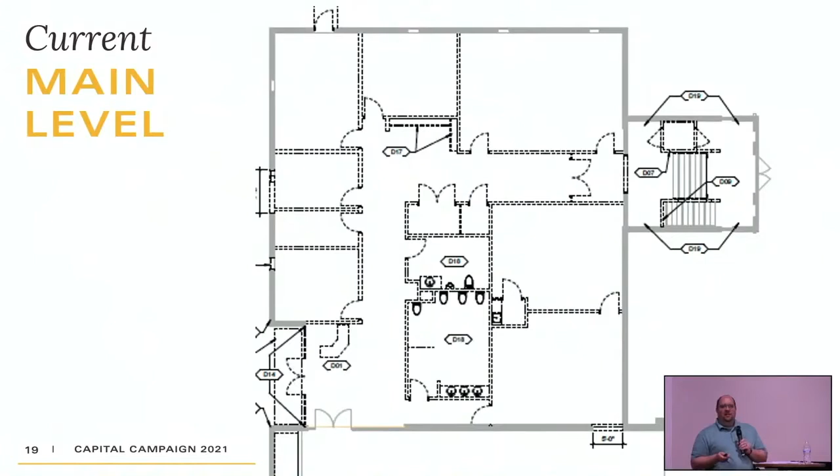We'll look at kind of where we are right now. I apologize for those online, I'm going to use a laser pointer, but we come in off the parking lot, and you've only got one choice of where to go, but you can't see your destination. You can't see the sanctuary. You have to go down a long hallway, take a hard left, and then about the time you get two-thirds of the way down the hall, you finally see the sanctuary doors.

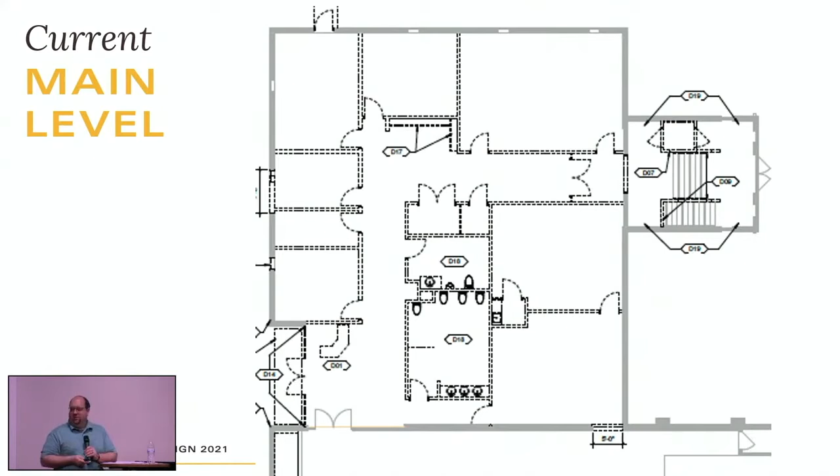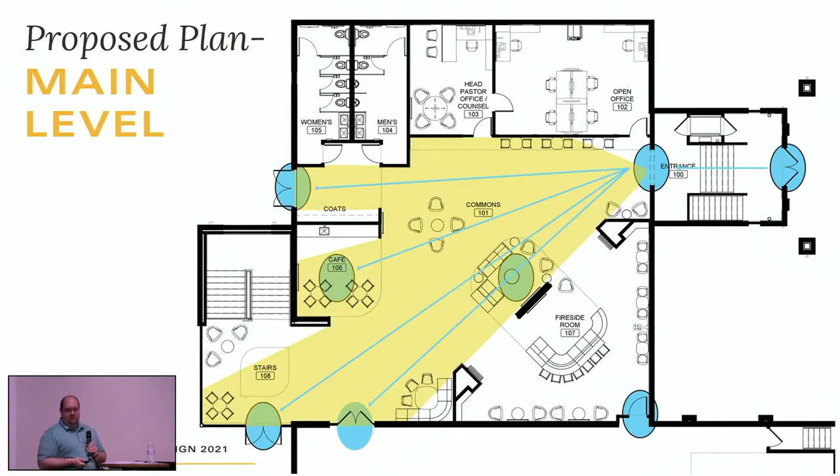Opening up those sight lines, being able to arrive, being able to instantly know where you're wanting to go, even if that's not your immediate destination, knowing where your final destination is comforting. It provides guests and visitors with a sense of welcome. We've got several opportunities to gather in different spaces, in different sizes, some formal, some informal. We've got access that brings everybody together, whether from the parking lot next door and coming in the University side, or from the main parking lot where most everybody comes in. Both provide opportunities for accessible entrances. Right now, that's difficult with our current configurations.

These are the things I find exciting. You get to see them in 3D and color. I'm a bit of a geek, though.

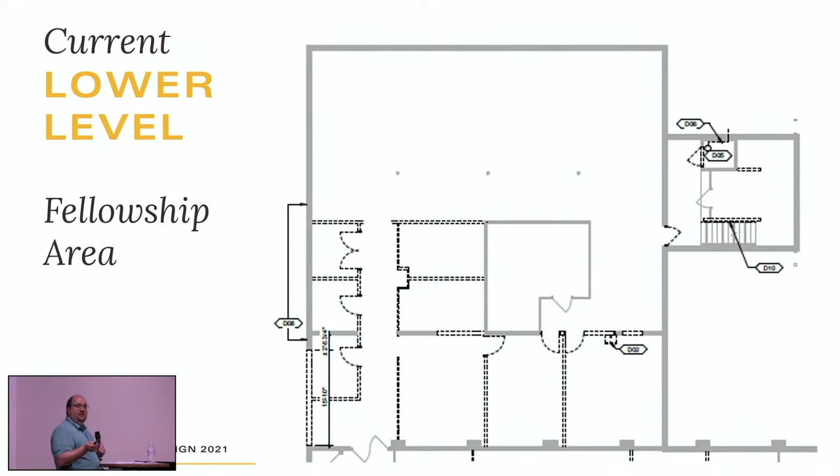Functionally, most of you know that's not really how we use that space. As we look at it, we queue up through the little rooms right there for meals and head around the kitchen. And so it makes a lot of sense to formalize that relationship.

The kitchen is what it is right now. Nobody's touching it. It's in good shape. But we really open up these areas between Fellowship Hall and opening up these classrooms down here into a new youth commons with large open corridors and openings that allow everything to flow together, to feel like more like one big open space. It will almost double our seating area for meals if we wanted to.

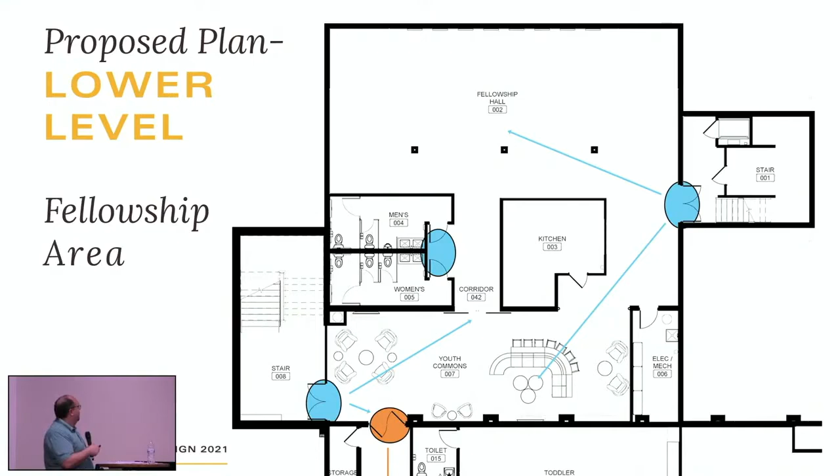At the same time, both upstairs and downstairs, we provide new restrooms that are more easily located for everybody to get to and more sized more appropriately for the capacity during Sunday services.

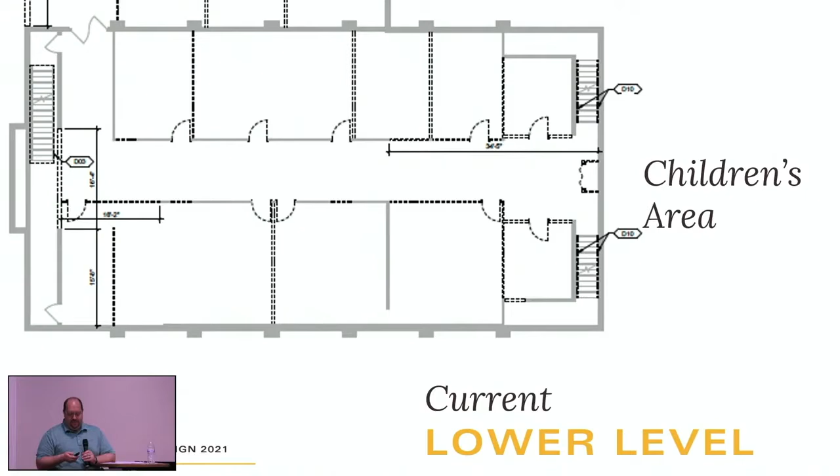In the existing children's area, as you know, we come downstairs right into the current children's area, and you either head up toward the dining area, fellowship hall area, or into the children's wing. Some of the concerns we heard from the groups were security, having our children safe, having the building safe, and having a stairway that goes right down into children's ministry is not ideal.

So we've looked at what are those opportunities to create more security points if we need them, both as a formal relationship and kind of an informal relationship. And as part of that...

Kids need bathrooms, right? We've got ones up here. We're going to bring everybody downstairs into one location, all of the kids together. We've got bathrooms that are located for the children's area behind the current set of double doors, eliminating that current stairwell, creating a very open, more daylit, more inviting stairwell.

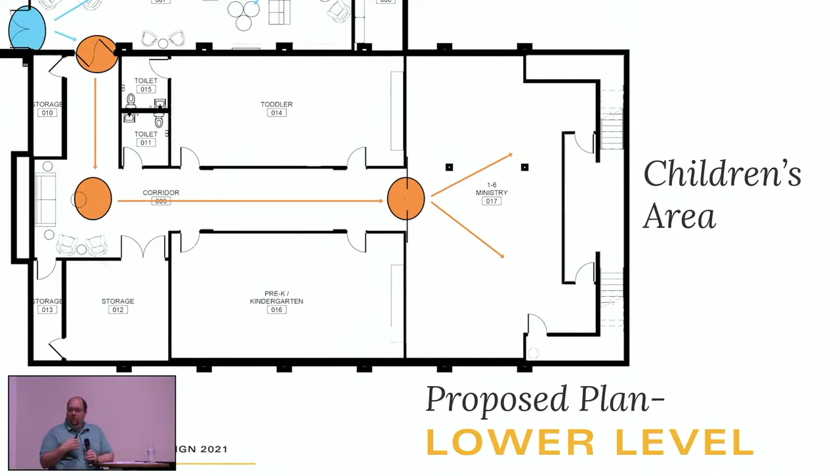And the opportunity that if we want to, we can lock this down after the service starts. We've got a gathering area either inside that secured area, or we've got the youth commons outside of the secured area where parents can wait after a service to pick the kids up.

By creating those spaces, by allowing the city to see who we are and how we gather, that creates a welcoming environment. It creates a lively environment. The property we're sitting on has hundreds of cars every day passing by. And for the building to be able to be part of that missional outreach is an incredible opportunity.

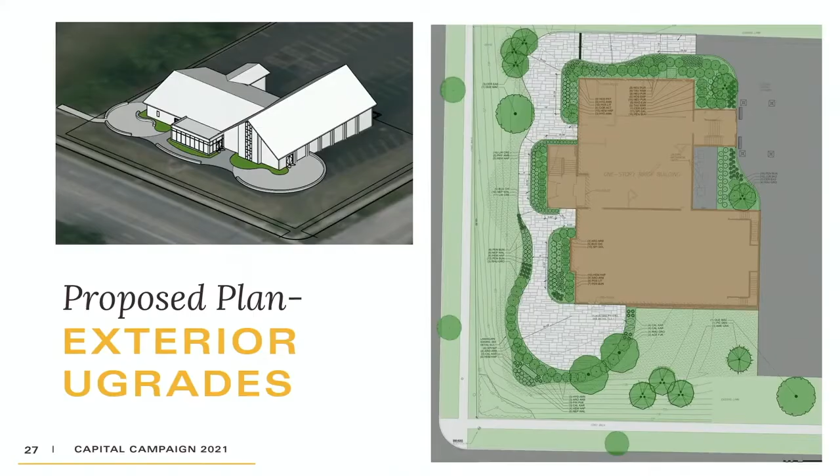So going through some of the details, and I know I've talked through quite a bit of them, but the goal is to open up the floor plan, to create more space, more room for members, more room for guests, as well as create an opportunity for us to enjoy God's creation and the beauty around us. We're creating a space that is more in line with the mission and that makes it easier to navigate for guests and easier to welcome those that are not necessarily here every week.

It's not a new building. We're adding a stair, but that's it. We're investing in where we are. This is simply renovating the existing structure we have to better suit our current mission.

So as part of that, we talked about more flexible gathering spaces throughout the building. Here's the fun stuff, you get to see some pictures of it. This is sitting back here by the sanctuary doors where the Welcome Center is, looking toward room 200.

What you don't see here is the big corridor with the bathrooms and the furnaces. You see a nice wide open view where you can see from across the room who you want to go talk to, or head over and grab a cup of coffee, or sit by the fireside and chat with a friend.

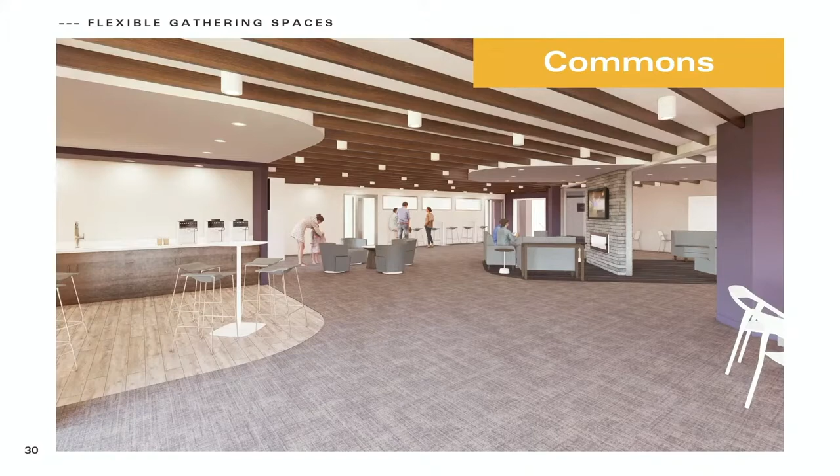Part of the new culture is not necessarily sitting in the sanctuary during a service, but having opportunities, whether for parents, teens, or others, to sit in the building and enjoy the service with us. We've created several places where that could happen.

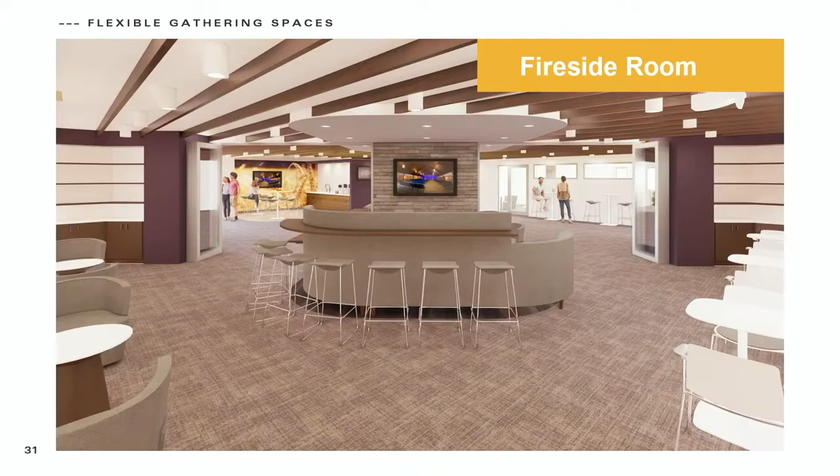This is what we're calling the new Fireside Room, which would be just on the opposite side of the wall here to my right, looking out toward University. Currently, that is the toddlers area that you never really see.

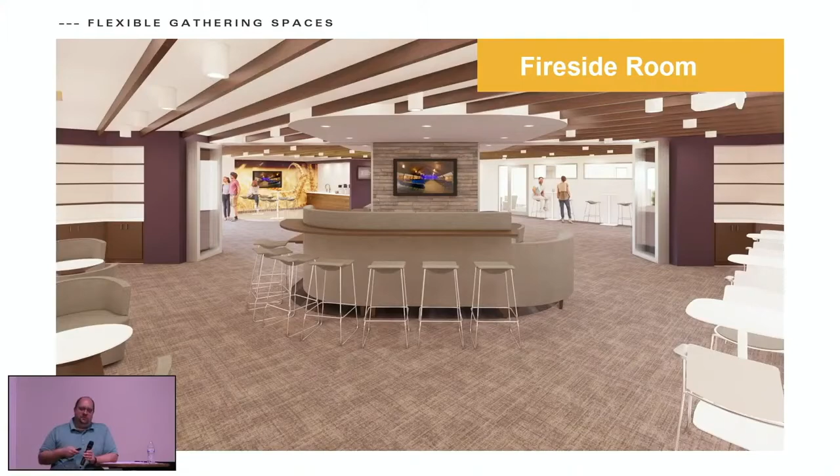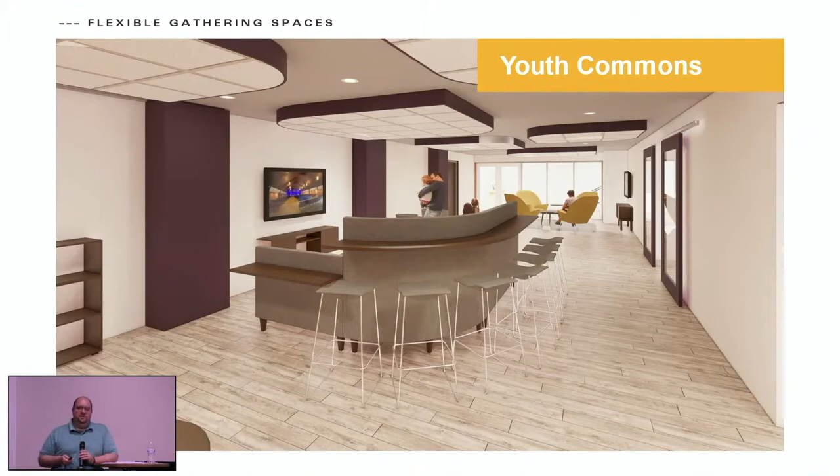But we've got some nice spaces here, opportunities to create both formal and informal, casual connections with members. The Youth Commons downstairs basically runs from the Welcome Center all the way back to this wall on the lower level. Currently there's a couple small rooms, a hallway, and a couple classrooms that we circulate through during most of the meal times. We're really creating a big, open, lively space that everybody can enjoy and hang out in.

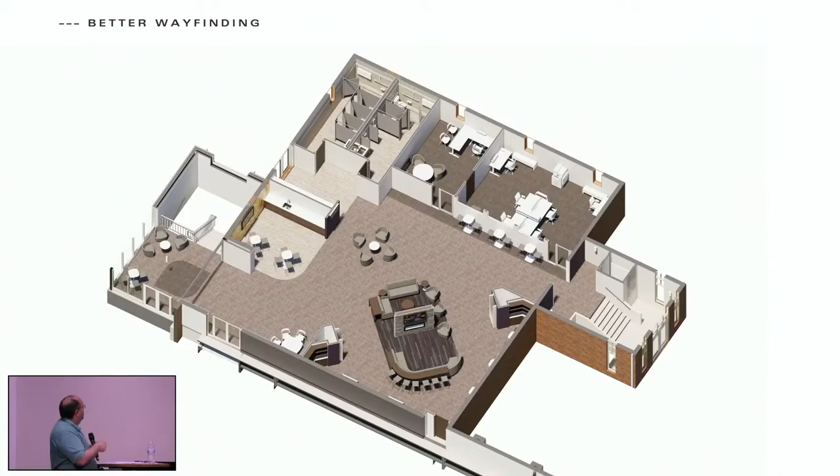So better wayfinding, I've touched on a little bit. We really want to be as inviting of a group and a family as we can, by being able to come up the stairs and know where you're going to go or where to find the coffee. I like coffee, so that's important.

That is part of what makes us welcoming and inviting. It's part of what gives people comfort in coming to join the church family here.

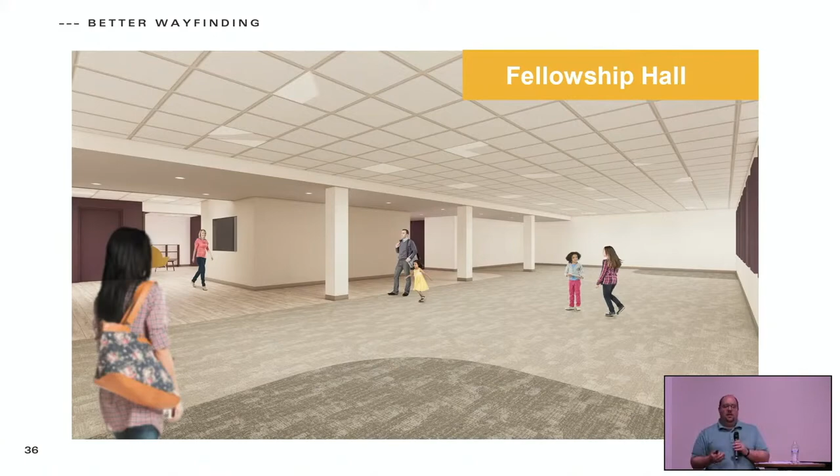Down in Fellowship Hall, we're opening up. You can see some of those sight lines back to the Youth Commons area, the new large hallway breaking up some of that long wall that's down there, helping to break up that space and make it not feel like one big separated room, but allow it to flow together with the Youth Commons area as well.

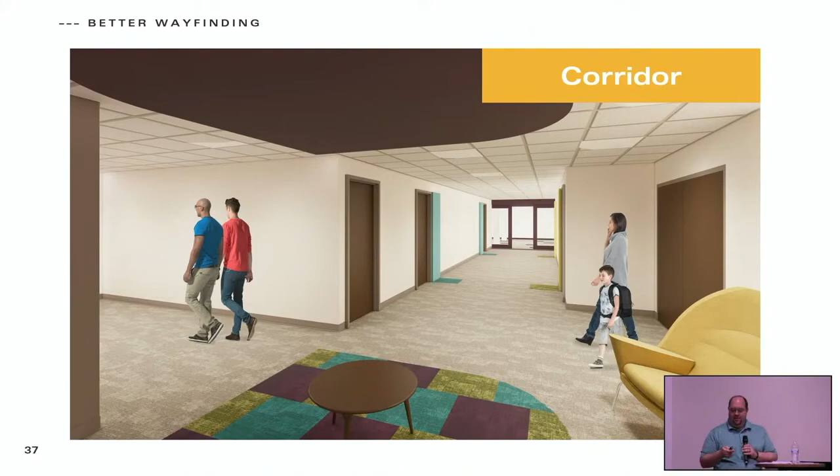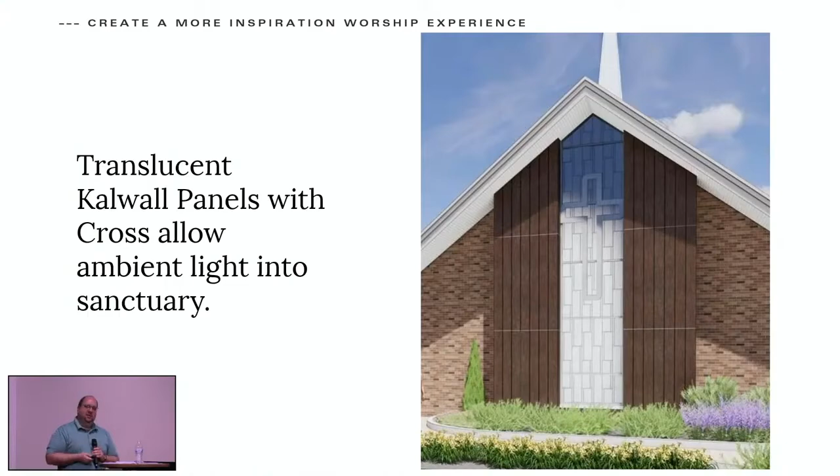So we talked about being able to enjoy God's beauty, and part of that is bringing more natural light into the building. For many years the burlap drape has been on the back wall, and as part of these upgrades we're looking at creating a Kalwall panel system that is translucent in nature, with a cross up on the wall to help people understand what our mission is — bring more light into the building, really enjoy the world around us.

It creates some excitement, some interest, and gives us an opportunity to recess some light fixtures up there a little higher and create some interest as you go through the space.

Having a centralized children's area was very important to the focus groups — an area that could be secured if needed, something flexible that families could feel comfortable dropping their young ones off at. As you can see here, we've created some much more open rooms, rooms that can be broken down with furniture as the age groups change over the years or as the need for adaptation becomes apparent.

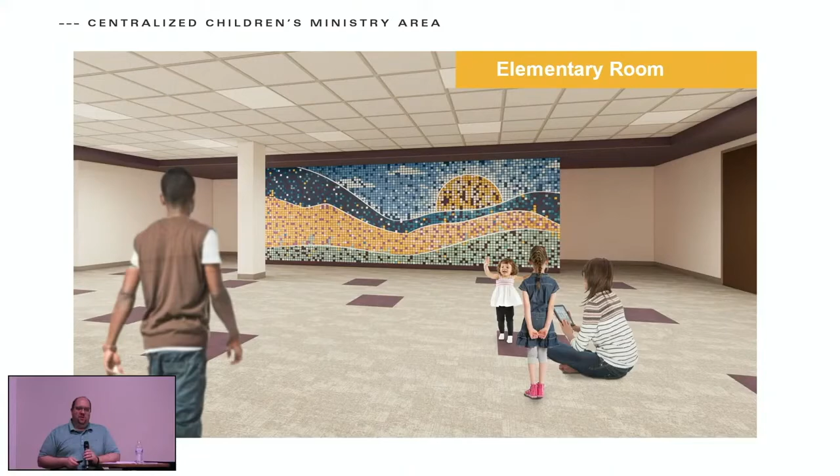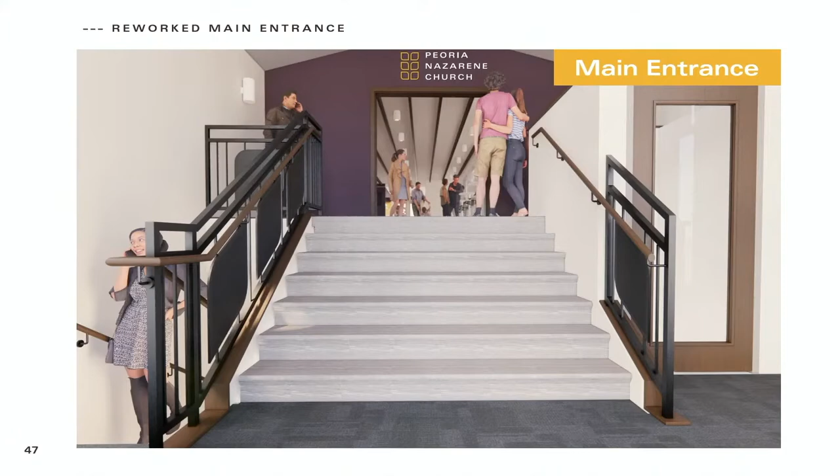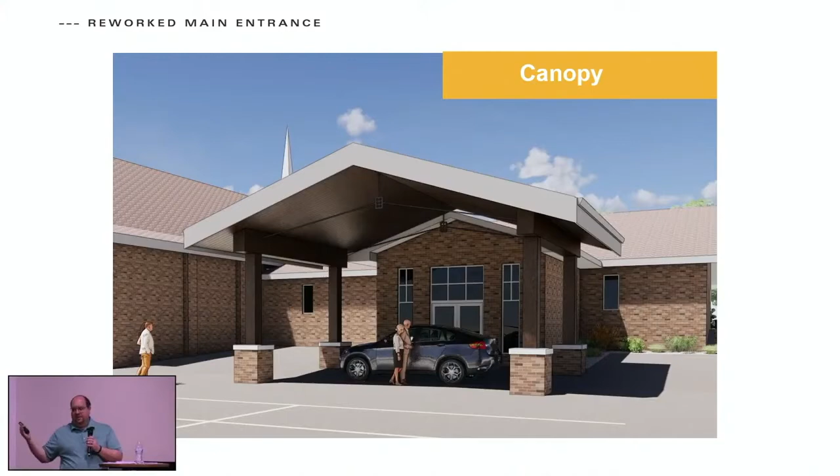One of the early concepts looking outside is the idea of bringing some of the beauty that we have here in the sanctuary and tying that together with what's going on with the new canopy. And I think in the final design here, you really start to see that. You start to see some of these beams that are coming up and over and really reinforce those relationships.

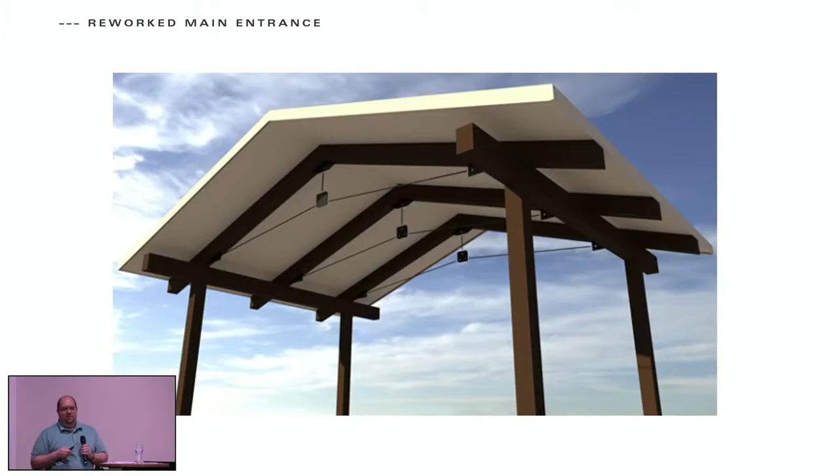So the new stair tower, I did mention, it will allow us better access to communicate between the first floor and the lower level. Easier flow for both width of the stair, be able to move more people at one time, but it also provides us a lot of light into our space. It'll provide us the opportunity for nice access to our patio area as well and create a big, beautiful front to our building, create a little more modern appearance and tie some of the aesthetics of that stair tower into the existing structure as we cover the lava stone.

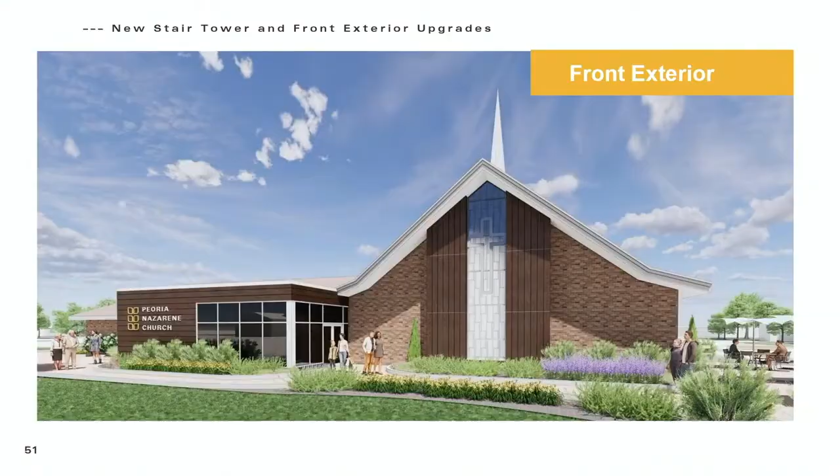Another view of our patio. If you're wondering, there is a drive that is maintained over here that is primarily for funeral services, for those that might be wondering. We have thought through both the final arrangements and the new beginnings with weddings, and there's a lot of these spaces that are adaptable and speak to multiple events throughout our church family's life. And so I won't get into the weeds on that, but that has been thought about.

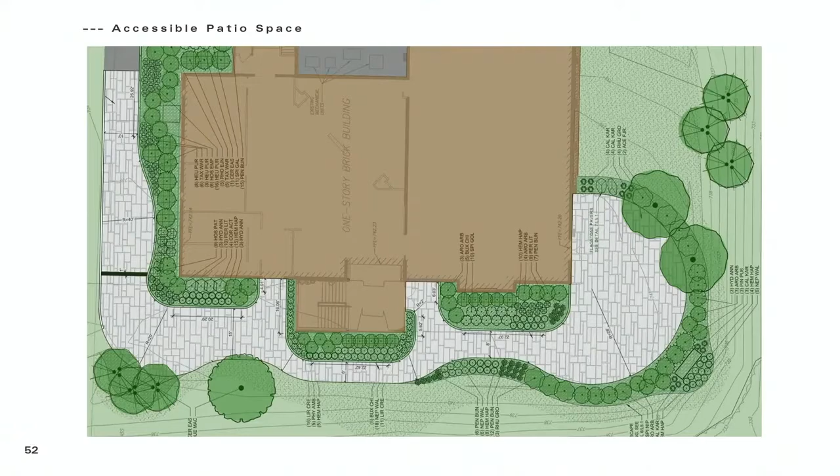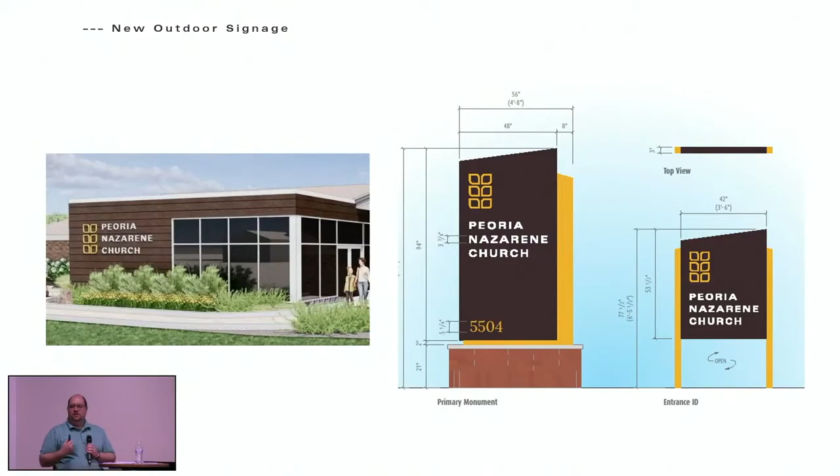And as we update the rest of our building and the exterior, we look at the signage and how did we tell people we're here? We're looking at new signage, very visible signage on the stair tower, which is a similar location to our existing sign. One of the challenges is if you see that sign coming up University, you've already passed Austin, you're not getting in here. So really, we want to take that opportunity to create some new signage, one at the parking lot area and one at the corner of University and Austin, so that you know when you arrive. Before you've passed it, you can turn in and come join us.

Better ADA access both upstairs and downstairs. We talked about the restrooms. We talked about the new open lift. And really a complete replacement and upgrade of our HVAC systems.

What's ADA? Americans with Disabilities Act. So that really talks to the fact that some of the population is less mobile than others. And that's not just the older generation, but there's younger generations. There's veterans that have been wounded. Sometimes that's a cane or a walker. Sometimes it might be a birth defect. Sometimes it might be a wheelchair, which is what most people think about, but it really goes far beyond that. And the idea of being inclusive and being welcoming to all.

As we look at our HVAC system, it was one of the challenges of opening up the floor plan. And it's also an older system that has required a lot of maintenance over the years, and it made a lot of sense as part of this expansion of the scope to really dive into that and create an opportunity out of what was a challenge.

So I want to touch base on some of the key points that came out of the focus groups. And that is safety, security, accessibility, functionality, and relevance. But just because of the age of the building doesn't necessarily necessitate that it has to be remodeled. This is really about looking at how we use our building, what our mission is, what our vision is, and making the facilities an opportunity to enhance those goals.